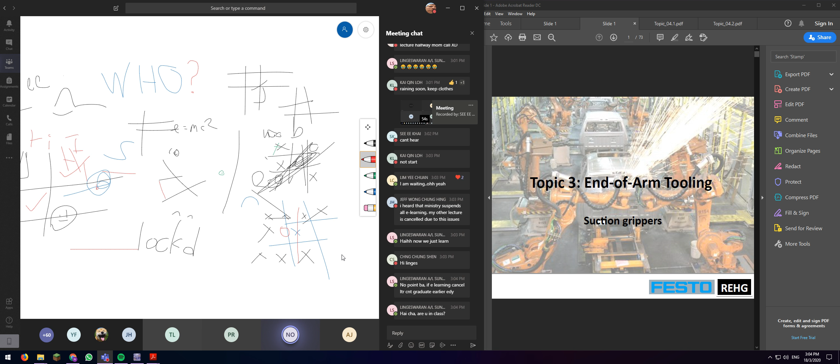Yes, Ungeswaran, definitely one of our priorities is that students are able to graduate. That's the whole point we run the course. So we will try, don't worry about that.

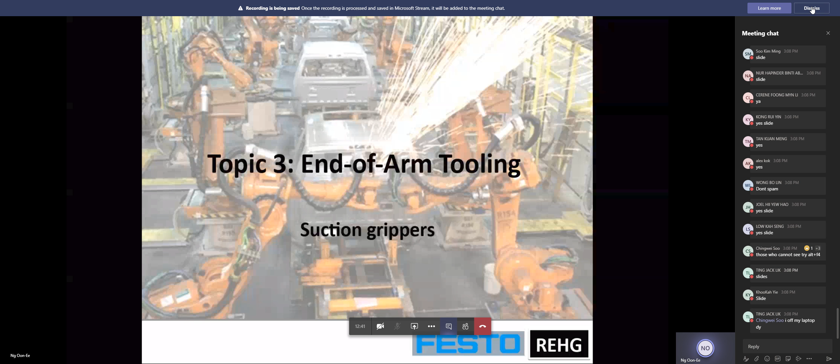There will be no attendance taken because we are not actually in class. So we will not be taking attendance for the whole period that we are doing e-learning this trimester. There will be no bar list generated for this trimester as well, if you have read the latest mail master sent out this afternoon.

That doesn't mean you shouldn't come for class. Even if attendance isn't taken, what is taught in class is still useful. So you make your own decisions. You are adults, I'm not going to chase you all. I give you the opportunity, up to you what you want to do with it.

So let's look at our topic 3, end of arm tooling. We have talked about the end of arm tooling previous to this, but this entire section here is about... oh, Angeline, a little unclear.

Are you using headphones or are you using the speaker of your phone? Angeline, are you using headphones or speaker of your phone? Okay, headphones. Is it still unclear?

Thanks everyone, but I'm asking Angeline specifically. Okay, it'll be good I think, because if the rest are saying it's quite clear, because if I make this louder it's going to be peaking already. Okay, so I'm increasing the volume on my input. Is this better, Angeline? And if this is too loud, please let me know now.

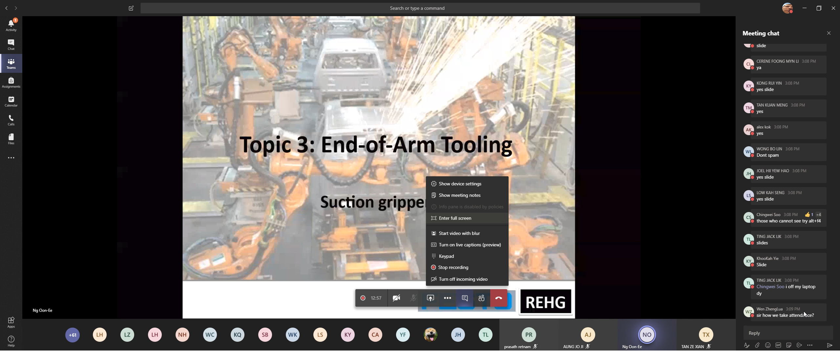Too loud, yeah, that's why I think there will be some type of what we call peaking in the audio. So sorry, Angeline, I will have to put it down. I would check whether you have a volume setting both on your phone as well as a volume setting on your headphones. Okay, apologize if it's slightly unclear. Okay, so anyway, 3:10.

Let's see how much we can go through. We have been talking about end of arm tooling.

Let's talk specifically about suction grippers. We have a chapter exactly on suction grippers because of how versatile and useful they are. So the slides you already have, but I'll put this up here so you know what I'm talking about. These are the different types of suction grippers.

Not all of these are robotic suction grippers. The one on the left, you probably have it in your bathroom. They are very useful, simple to make, cheap, and you can use them to carry many things. For example, on the left hand side here, a vacuum layer gripping system allows you to carry bricks in a particular arrangement, then put them down together like that. So you can carry construction material, heavy things, and there's a lot of suction being used for this.

That's called a suction spider, used to handle and separate porous sheets of insulation. Obviously it's easier to imagine using it for glass, but on the right hand side you can see it's being used for metal pipes actually. So this is all possible.

When we talk about suction, don't just have the idea of the simple suction cups you use on your bathroom wall, because those are simple - you can only stick them on the bathroom wall. If you've tried to stick it on a plaster wall, you'll know it doesn't work, right? But when you're providing external power for the suction, there's a lot more that we can do with it.

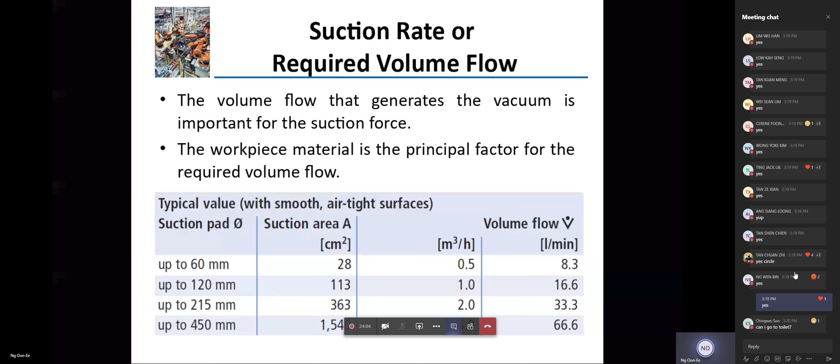What type of GIF you putting? Waliu. Hi, Cheng Yang, welcome to class. We are halfway through.

Okay, yes, too late, sure fail already. Oh, that's fair enough, do you need more time, Jinghao? Okay, it's been 1 minute. I wonder if he's running or not.

Yes, Prasath, I think I started the recording. I hope the recording works and you will be able to download it. Hopefully that, but for those of you who have attended, once you listen like this, most likely just reading through the slides is faster. Most of you reading will be faster than watching video. Yeah.